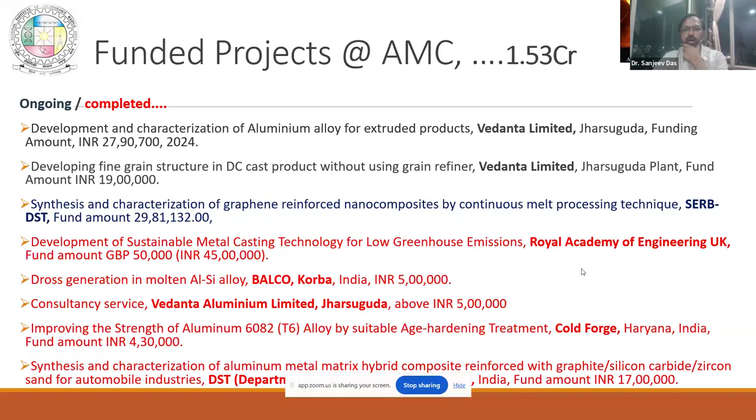Now, this near about 1.5 crores of funding we have received in the last 7 years, and the red ones are already finished, while the dark black ones are basically running projects that are going on. Now let us come to the problem statement - why we are doing this research.

These are the numbers of vehicles that will be there - 1450 million vehicles will be on the road by 2030, and they will consume near about 2000 billions of oil. Also a lot of CO2 emissions will be there, and a lot of vehicles will be scrapped, because in India you can generally sell second-hand or third-hand cars, but in most developed countries, they do scrap their products. So we have to start thinking about all these things.

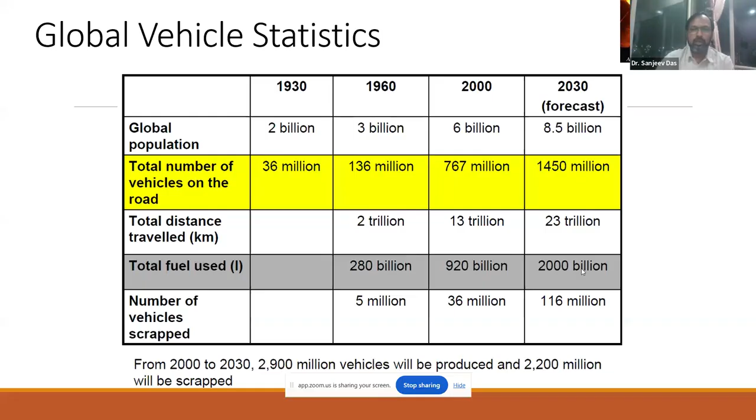Now, as technology has advanced, we have seen that the weight of the car is increasing day by day. The reason for that is basically the safety issue. Earlier, when motor cars were initially there, they were very light, but the speed was not that great. So the accidents were not that fatal.

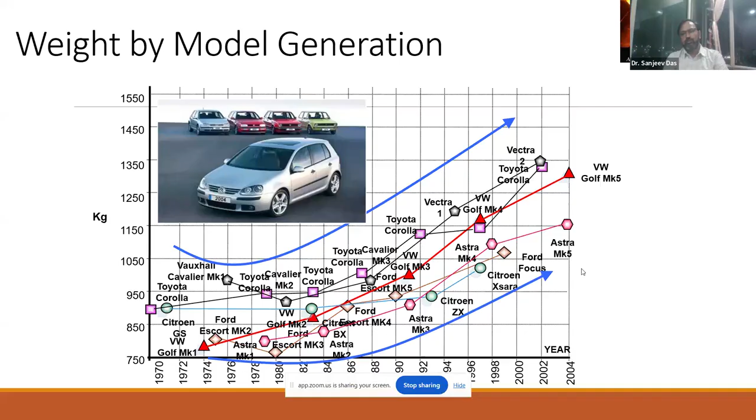When you increase the speed, then your car should be crash resistant, and to make it crash resistant, people use more metal on it. That basically increases the weight of the car. Now if there is an increase in the weight of the car, it will consume more fuel and emit more CO2 gases. So that is the issue we are basically addressing.

A mechanical student can easily understand that if the weight of the car is high, a lot of things will act on it: acceleration resistance, the weight works there also. If you accelerate the car, or go uphill, gradient resistance and rolling resistance are there. Only aerodynamic resistance depends on the design, but the rest directly affect the weight of the car.

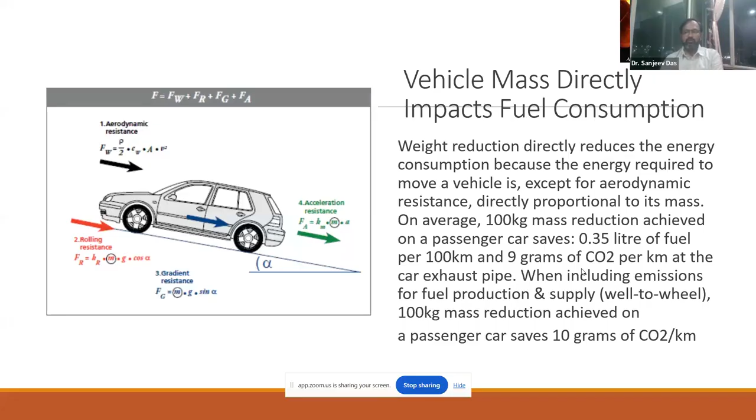Now if the weight is increased, then the CO2 is increased. Here we can see how much CO2 will increase when we increase the weight. And increasing CO2 means you are spoiling our atmosphere.

So what people are doing is trying to use aluminium alloys. In aerospace or aircraft, aluminium is vastly used because the price is not an issue. Quality, durability and accident resistance are very important in aeroplanes. But when you go for a car, the price increases. Still, some companies are using more aluminium extruded products in cars.

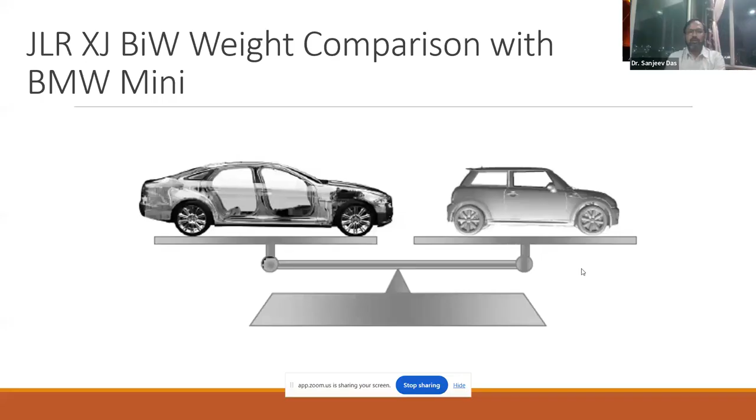So this is a two-car comparison. You can see one is a sedan car and one is a mini car. The sedan car is basically JLR, Jaguar Land Rover, which Tata has already acquired. You can see that an aluminium frame of the JLR sedan car is equivalent to the weight of a BMW mini car, meaning this big car will spread the same amount of CO2 emission as the BMW mini. So that is how, when you change the material, you can get better output.

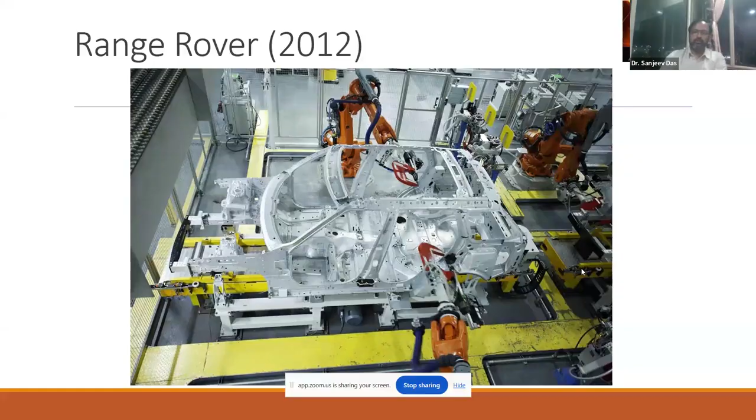Now, why am I talking about cars only? Because there are a lot of modes of transport — rail, aviation, ship. But if you see the pie diagram, 41% of the cars are there in the transportation sector, which contributes to greenhouse gas emission. So that is the real concern.

Now we are aiming to drop down the weight of the car so that the direct CO2 emission reduces. For that, number one, you use lightweight material — the lighter weight is aluminum, even more lighter is magnesium — because their density is very low compared to steel. Aluminum has one third the density of steel, and magnesium has one fourth the density of steel. However, the strength and cost of production is the issue, because steel strength is very high.

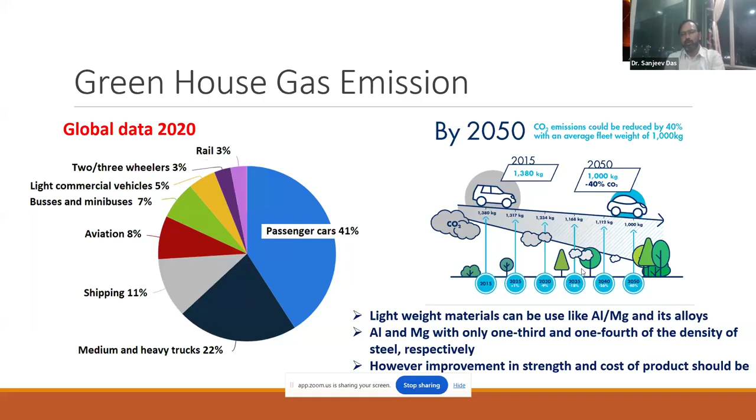So it is very difficult to replace steel. If somebody says they can replace steel, that will really be an engineering challenge. Also the cost of production is an issue, because aluminum production cost is much higher than steel production cost. A lot of other factors like recycling also come into play when talking about using lightweight materials.

In India, mostly we reuse. If it is not working, we fix it and then reuse again. Sometimes we remanufacture it. But this has to be there to minimize energy consumption. We have to reuse, remanufacture, recycle, and do recovery of whatever we can, so that we don't dump things and the cost of production decreases.

Now, as mechanical engineers, what they can do is design structures such that less weight material is required, and that can be easily detached and recycled. As a metallurgist, what we can do is refine the structure or use certain alloys and composites, so that you can get better mechanical properties with lower weight.

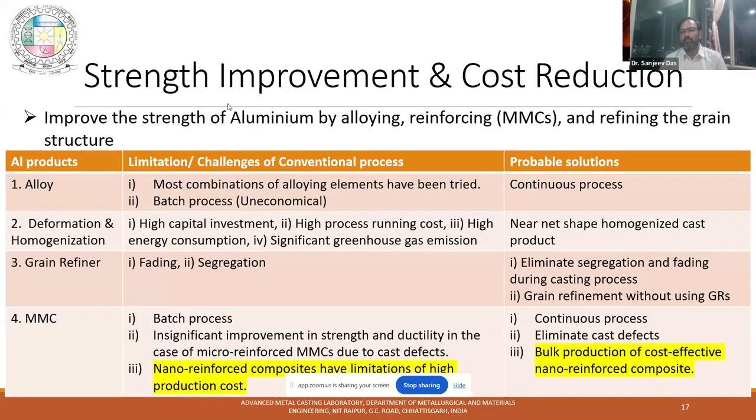Now, based on this table, let us go for further understanding through the pictures. Now, I told you about batch type processes.

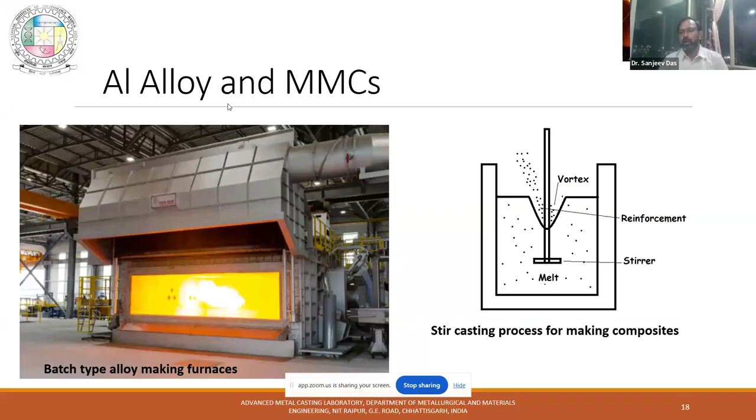Now, about making metal matrix composites, most metal matrix composites by the liquid metallurgy route are made by the stir casting process. What you do is take a mold with liquid metal, stir it to get a vortex, add particles into the vortex, and they get mixed. But again, this is a batch type process, not a continuous one. If we make it continuous, production will be high and cost will immediately decrease. So how can we do that?

About grain refiners, I have told you they are basically rods containing titanium boride in aluminium. It's like a composite itself. This titanium boride acts as a nucleating site during solidification, giving you a fine grain structure. Industries buy these grain refiners from European countries, and they are very costly, but they use them for refining the grain structure.

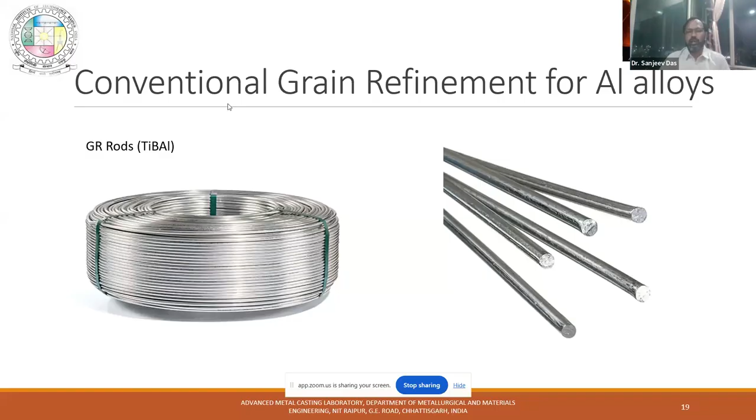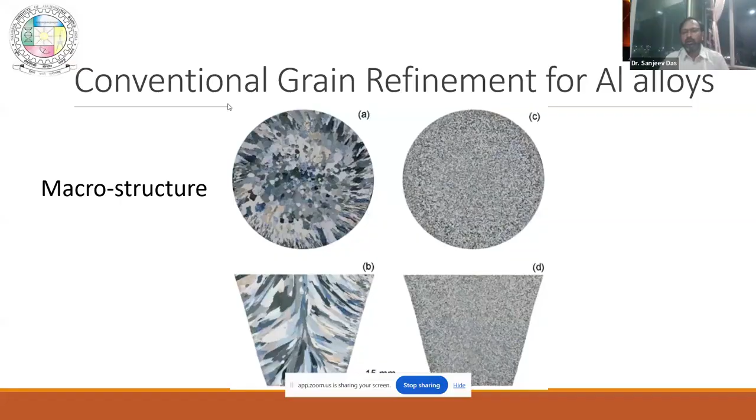And there is an equation called the Hall-Petch equation, which metallurgists are very familiar with. If the grain size decreases, the strength increases, irrespective of chemical composition, alloying, or anything else. So that is the beauty of the grain refiner.

Now let us come to some basics to understand what exactly solidification is. Solidification is basically the transformation of a liquid into a solid. That is the simplest way to understand it. How it happens: number one is nucleation, and number two is growth. First there will be nucleation. So nucleation is a separate science, and growth is a separate science.

Nucleation can be further categorized into homogeneous nucleation and heterogeneous nucleation, so two types. What is homogeneous nucleation? In liquid, atoms come together as the temperature drops and form a cluster. Initially one cluster forms, but there is latent heat release, so this cluster breaks up again. As you keep dropping the temperature, more atoms come closer, making a bigger cluster, and when a nucleus is formed with a critical diameter, the growth starts.

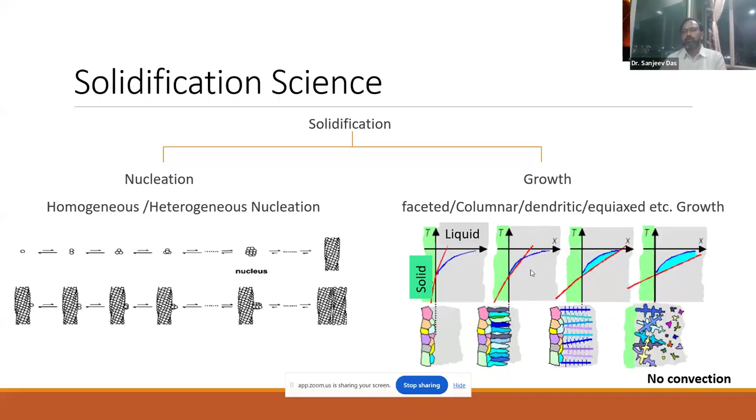It also depends on the temperature gradient, meaning what is the temperature at the center and what is the temperature at the surface. If the temperature at the center is very high and the surface is very low, maybe a faceted structure will happen. You can see the red line going from vertical slowly to horizontal shape. If it goes down like this, different types of these structures will form. Irrespective of adding any grain refiner or alloying element, you can change the structure by changing this type of thermal gradient and the situation inside the liquid metal.

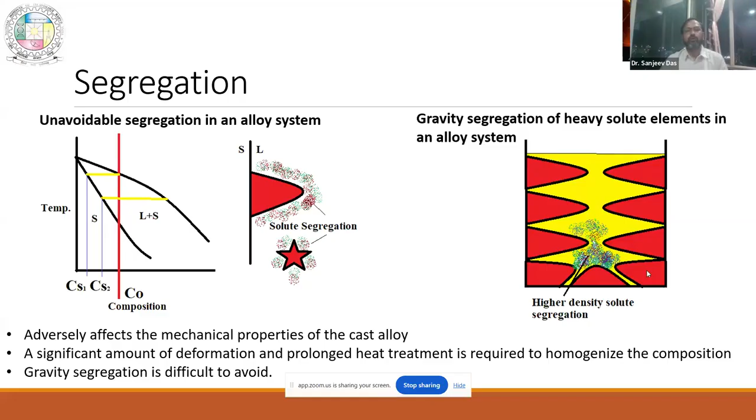Now, if you have this kind of segregation, it is called macro segregation. Macro segregations are very difficult to get rid of, so you have to do a lot of homogenization treatment, and that will consume a lot of energy. And suppose your solute density is quite high, it will tend to go down by gravity - that is another issue. I will show you some aluminum-tin experiments also later. So these are some of the issues we have to take care of when working on it.

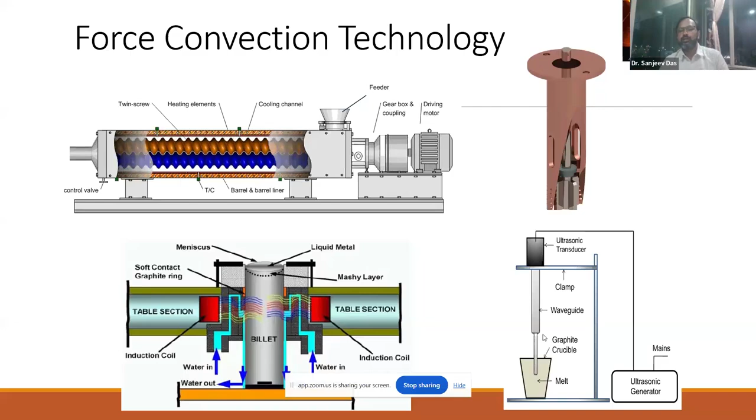The fourth one is basically the ultrasonic way of creating forced convection. There is a process called cavitation. When you pass ultrasonic sound, there will be formation of very small voids. These voids will capture a lot of dissolved air inside them. As these voids or bubbles increase, the pressure inside will go lower and there will be a collapse. When it collapses or implodes, there will be a lot of agitation inside the metal, and by that agitation you can create convection inside the liquid metal.

Now, with all this information, we have made a DC caster. A DC caster is a machine used by aluminum industries, where there is a mold which is basically open at the top and bottom.

You put the liquid metal there, you have a stopper plug. Initially the stopper plug is there, so you fill the liquid metal, and when solidification starts, you draw down this stopper at the bottom, sliding it with the help of a pneumatic, electric, or hydraulic system. The liquid converts into solid directly, so a very small mold can cast a huge length of billets, ingots, and the like.

Now, this is a rotor-stator device. We have placed a rotor-stator device as I showed you earlier, creating a forced convection when solidification is starting. We want to see exactly what happens when you create an extra forced convection during solidification. So we designed a full machine here, which is a lab-scale DC casting simulator.

In this you can see the hydraulic system, and you have the billet casting stuff. There are two furnaces in the design. This is the picture where we manufactured this in our laboratory. Everything was manufactured by our students. We indigenously developed and designed this process, and did all the experiments. Only the furnaces were purchased, and the rest of everything was made by us indigenously.

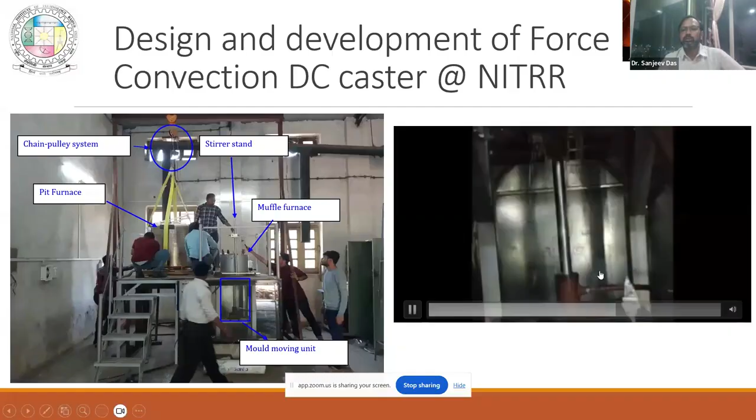Now you can see the video of how it works. You are pouring the liquid metal, using the rotor-stator device at the top, and the casting has started. You can see the piston going down, and the billet coming out from the bottom. This is how the microstructure changes.

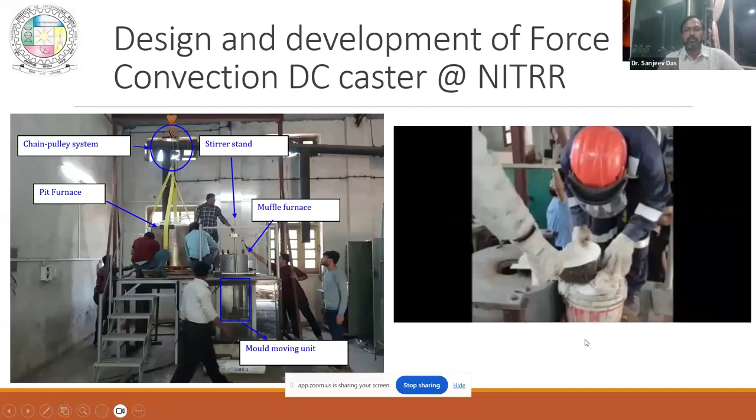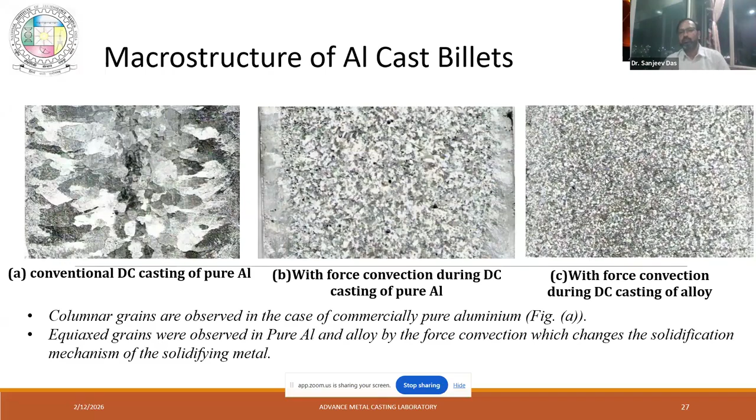Now let us show you the macrostructure. If there is no rotor-stator device, you get big columnar grains, random grains. At the center there are fine grains, at the side there are fine grains, and in the middle you have columnar grains. When you start forced convection, all the structure changes into a fine grain structure, and for alloys it is even finer. This is the beauty of it: without using any grain refiner, just by introducing forced convection, you can change the structure. Basically, you are decreasing the grain size, and by decreasing the grain size you are increasing the strength of the material without changing the chemical composition.

Now, again, we have added tin, a heavy metal. The density of tin is much higher than aluminium. So if you don't use a rotor-stator device, the tin will settle at the bottom. But if you use it, it equally distributes inside the billet. So you can beat gravity, and beat columnar grain formation, with the forced convection machine. We have a patent for this technology.

And the next one is basically by the electromagnetic method. The earlier one was by mechanical forced convection.

This is the electromagnetic setup. I have shown some photographs of the TP1 test procedure where we basically measure the grain size. This is the equipment for the TP1 test, and this is the mold. It is basically a conical type of mold where you pour the liquid metal and place it here, and the water jet comes from the bottom.

When the water jet comes, what happens? The solidification starts from the bottom to the top, and you get more columnar grains from the bottom to the top. Now, if you have good refinement, these columnar grains will not form and you will get a refined structure. That basically shows how good your grain refiner is.

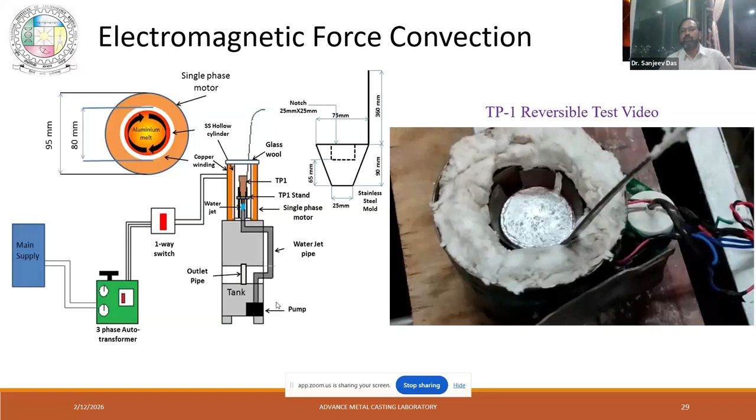You can see the motion of the liquid. You can rotate the liquid clockwise, anti-clockwise, both directions, by changing the current. Now it is solidifying - you can see slowly the motion is decreasing. So now, without adding a mechanical stirrer, by electromagnets you can basically rotate and have a forced convection.

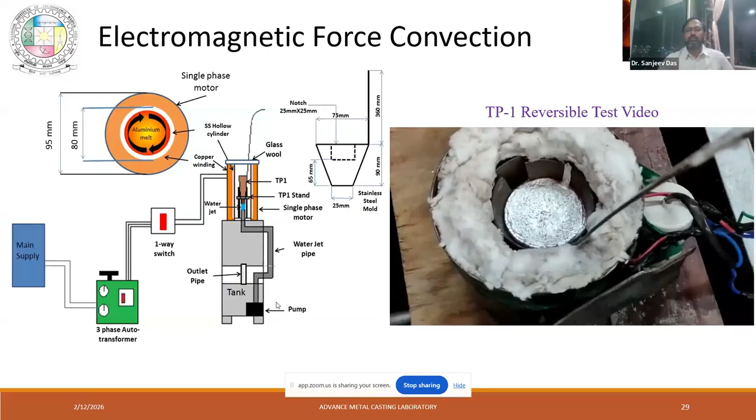So based on this result, let us see what we get in the microstructure. Again, we take a section of it, the top section, and you see there is a certain amount of refinement. Now if we quantify it, we see that the grain size decreases with the current. Current means what - if you give higher current, you get more magnetic field, right? So as you increase the current, the grain size is decreasing.

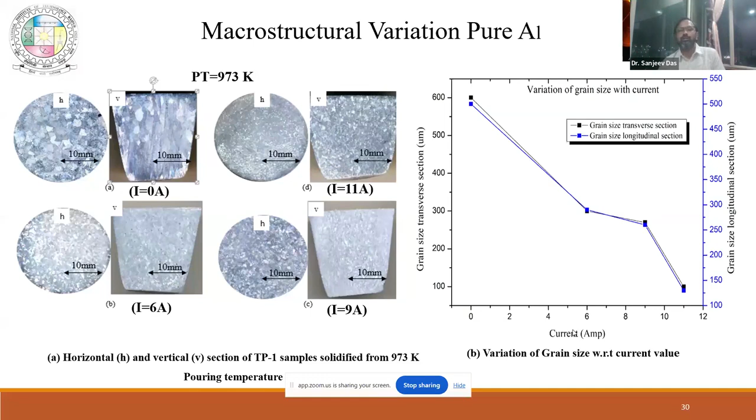Now this is the beauty of it - it's not about how much grain refiner you have to add. It's about how much current you are giving to the liquid metal during solidification, and it will create the magnetic field, the stirring effect, and finally decrease the grain size. So we are completely eliminating the presence of grain refiner here.

Now that is the test procedure. Now we have to see whether this really works in a real industrial scale, or in some prototype or not. So we made a twin roll caster. Now what is a twin roll caster? We have two rolls rolling in opposite directions.

You put the liquid metal from one side and you get the solid strip. Now you can make near net shape strips, so you can eliminate all this hot rolling, cold rolling process. You cannot fully eliminate it, but you can certainly decrease a lot of hot rolling and cold rolling, and you can really save a lot of running cost and capital investment.

So this is the twin roll caster which we have designed and manufactured in our lab, and we have put some electromagnetic stuff in this twin roll caster when we are putting the liquid metal.

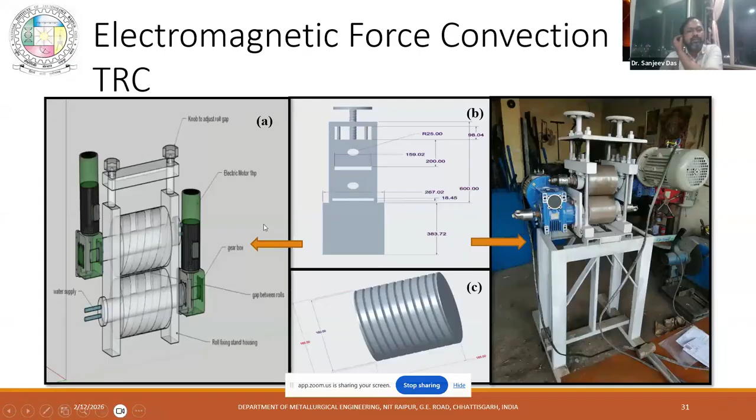Now let me show you our design. So here there are two rolls inside this - these are the roller assembly, and these are internally water cooled rolls. You can see there are some grooves on the rolls inside, so the water runs in these grooves, and there is a sleeve at the top which is water cooled. So the temperature is completely maintained here, right?

And then you have the tundish here, from where you put the liquid metal, and the magnetic field is there which will rotate the liquid metal during the solidification process. We have also patented this technology. This is a picture of the real one - here, this is the magnetic field we are generating.

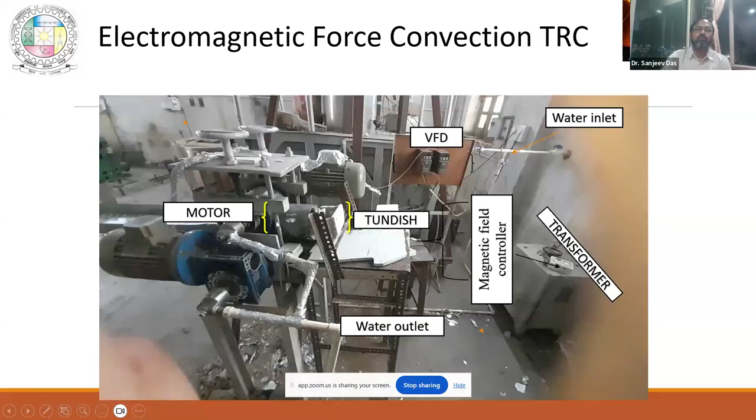This is the tundish - we pour the liquid metal here, there will be some turbulence, and then you get the sheet metal casting. So these are some of the castings we have tried with different pouring temperatures and different currents, and we tried to understand which is giving the better casting.

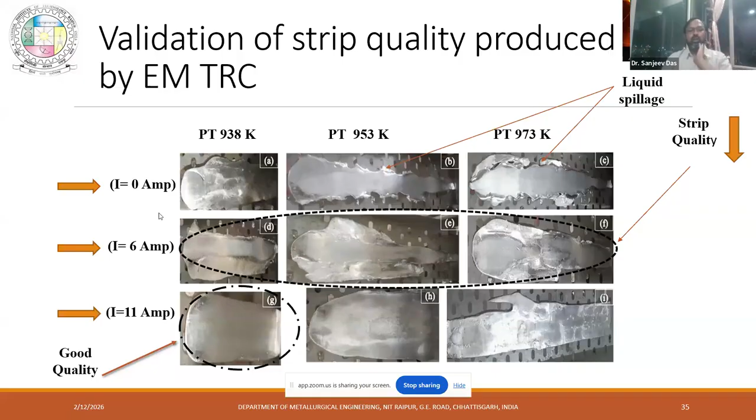So in lab scale, we do extreme experiments. You will see a lot of strips are very ugly - we are doing some extreme stuff, and then we are getting some good quality also from those combinations. Now this is the sectional picture - like if there is a strip, you cut the strip and take the cross section.

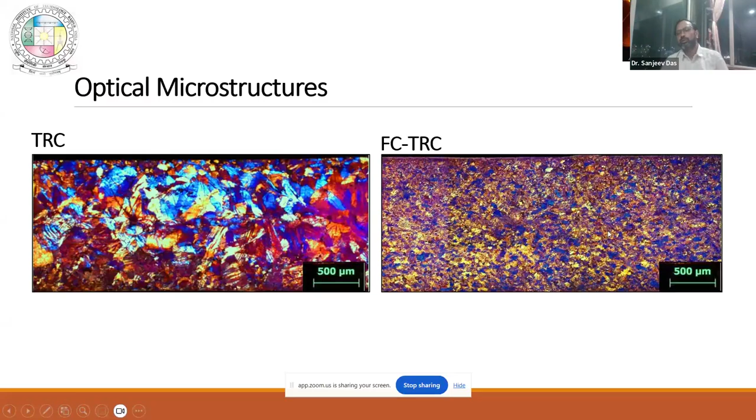Now the cross section we have seen under polarized optical microscope to observe the grain size. Normal twin roll casting will give you bigger grains, random, a combination of fine and big grains. But when you apply the electromagnetic setup, you get a fine grain structure all over it. That is the beauty of the technology.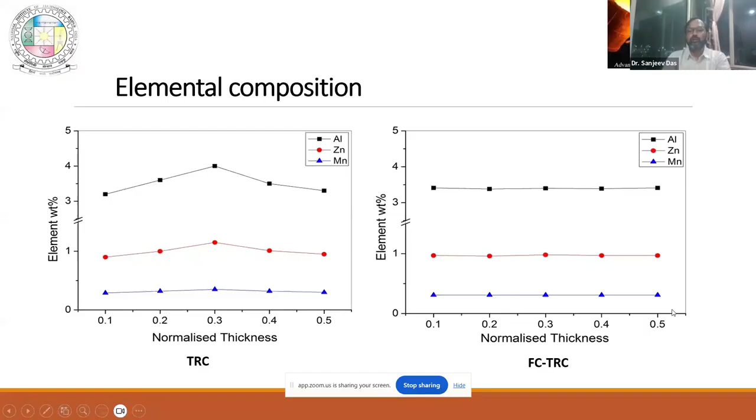If you see the elemental composition, there is a lot of segregation in the case of normal twin roll casting at the center, but it is quite uniform for the forced convection twin roll casting.

Now about homogenization. We tried to do some homogenization of these materials. After 3 hours of homogenization, we still find some bigger grains in the twin roll casting stuff. But after just 1 hour, you get a very fine equiaxed structure in the case of forced convection twin roll casting.

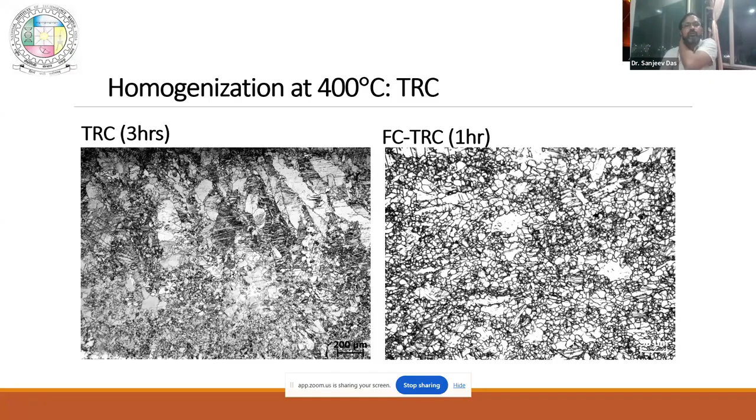This next part is the complete cycle of how we are homogenizing these strips. You will see that for TRC, it is very random with very big grains. But for forced convection, after 15 minutes you can get a very equiaxed, fine grain structure, and it stays constant. Now the question is why this happens.

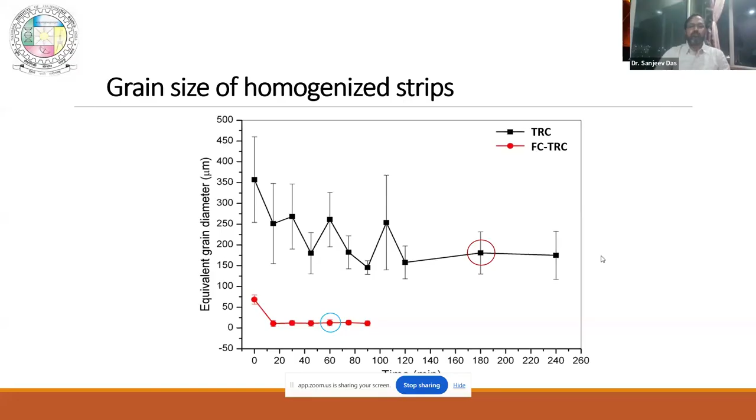Now when it comes to the center of the casting, it drops down the melting point there, which is understandable by the phase diagram. And what happens is that your twin roll casting is divided into two parts. Actually it's not just casting, it's casting as well as rolling. So it has a casting part and a deformation part.

But if you have some convection, if you are adding any particle, or if there is any alloy, the nucleation starts in the liquid, not from the surface to the interior, and your deformation region basically increases. When the deformation region increases, you get a lot of defects like dislocations and so on, which helps in dynamic recrystallization. So it is much easier when you have more deformation, and that's why less time is required when heat treating the material to get the desired structure.

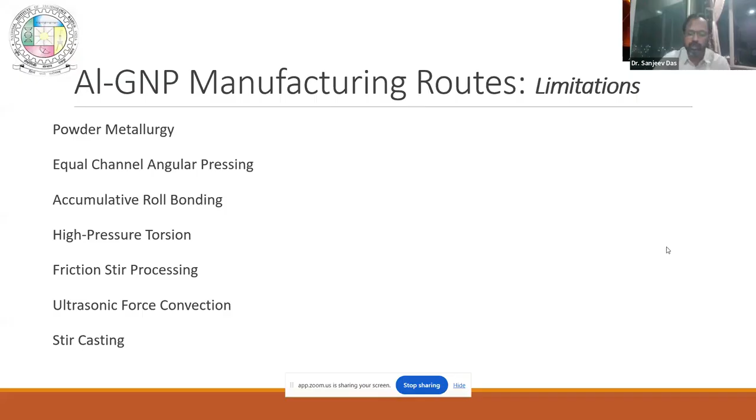Nanocomposites are basically made by a lot of different processes, so one by one I will tell you about them. Number one is the powder metallurgy process. This is a very easy process to do. You take different powders, mix them, then do compaction using different types of tools to get different shapes, and then do the sintering part. During sintering, you make the composite or the components.

But the problem is, when you are adding all these particles, you are not able to take out the air entrapment which is already there, so there will be a certain amount of porosity left in this kind of process. Another issue is you cannot make very huge production by the powder metallurgy route. You can make a lot of small products, but huge products are very difficult to make because you require a lot of hydrostatic pressure.

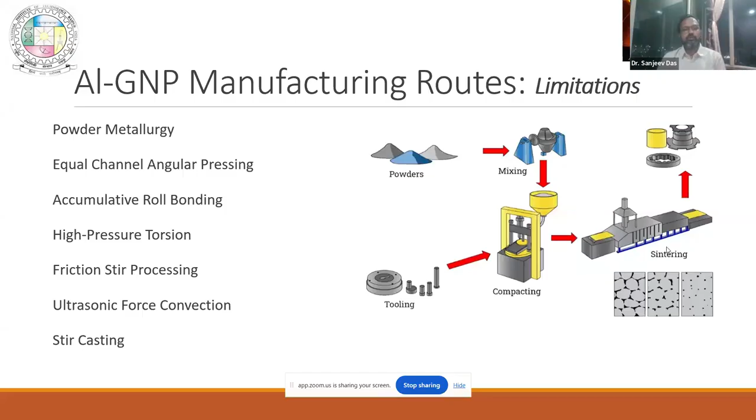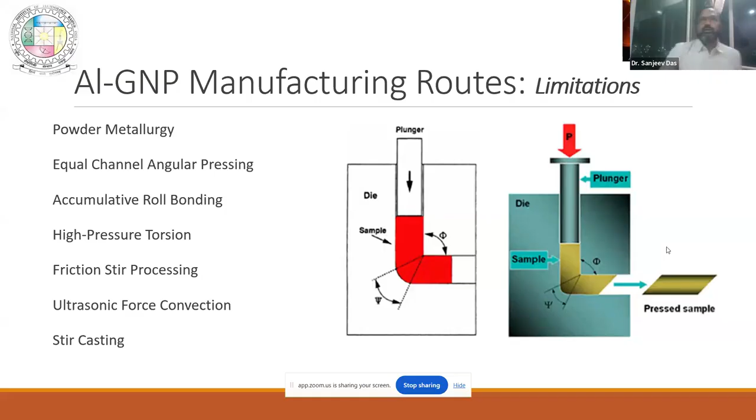Next is basically the equal channel angular pressing. Here what you do is you are mixing these materials in an L type of pattern, and then you use a plunger and forcefully bend it, thinking that it's going to mix. But it's very difficult because it's a solid stage process, and it's very difficult to get a uniform mixing of these particles.

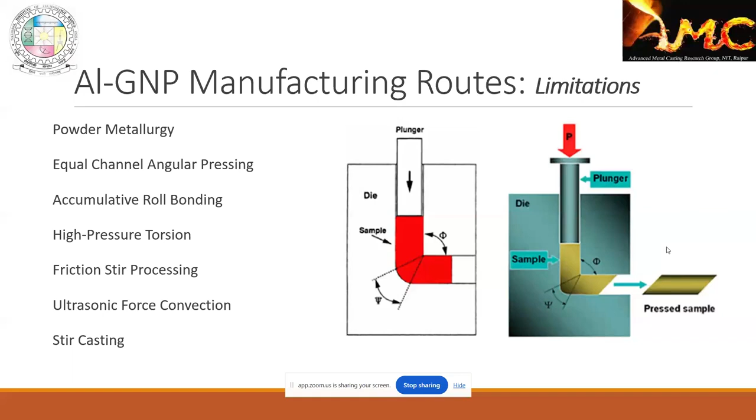Now, the third one is accumulative roll bonding. So you take the particle, make a sandwich, and then start rolling it to a thinner section, assuming there will be nice mixing. But I doubt it, because these particles will stay in the middle, making a sandwich type structure, and it's not going to uniformly distribute the nanoparticles.

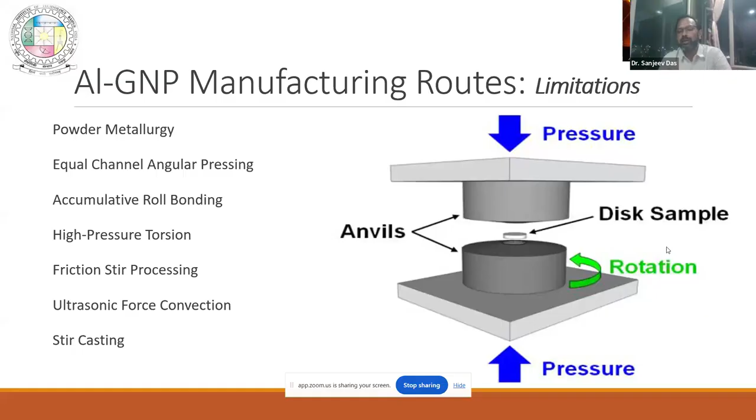The next one is high pressure torsion. You make tablets at the center and create a torsion force so that it mixes and joins together. Again, the limitation is like the powder metallurgy route - there may be porosity and there's a size restriction.

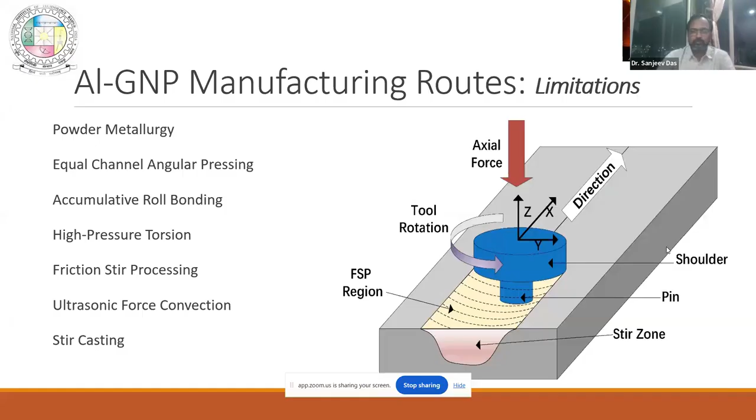Then friction stir process. Basically this is used for welding, but some people have tried adding particles when doing the friction stir. But again, it will be on a line joining part. How you are going to make a plate out of it, or a bulk material, is challenging.

The second last one is ultrasonication. It's widely used by a lot of people to make nano composites, but ultrasonic forces basically don't incorporate the particles inside the liquid metal. What it does is uniformly mix it, but you have to incorporate the particles by the stir casting process, and then use ultrasonic treatment to uniformly distribute the nanoparticles inside the metal. So ultimately you have to do the stir casting process.

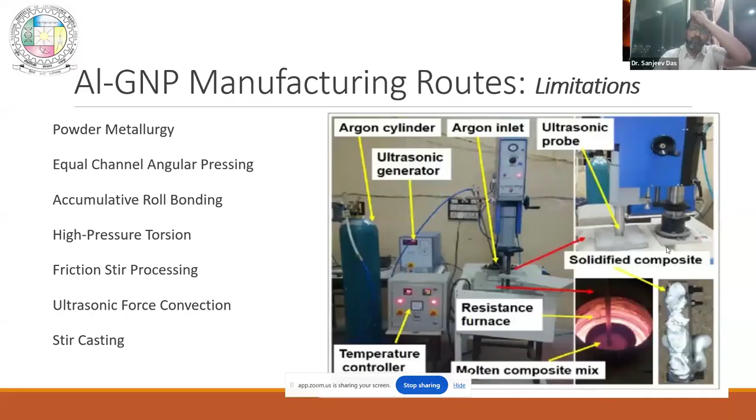Initially I showed you there will be a vortex formation, and in that vortex you have to add the particles. Now when there is a vortex formation, anything on the surface goes inside the liquid metal. Suppose some dross, slag, or air is at the top - everything goes inside your liquid metal, making it full of porosity, gas bubbles, and slag, contaminating your melt. Now whatever ultrasonic treatment you do, you are not able to get rid of those things you added by creating the vortex.

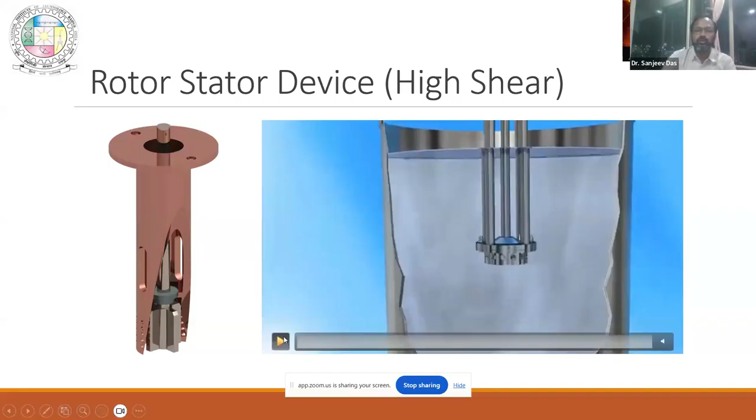That's why we went for the rotor stator device. Earlier I showed you the picture of the rotor stator device. Now I will show you the video so you can understand how exactly this rotor stator works.

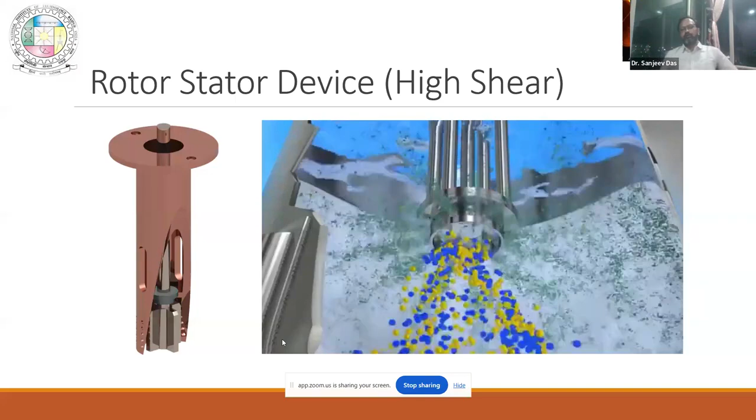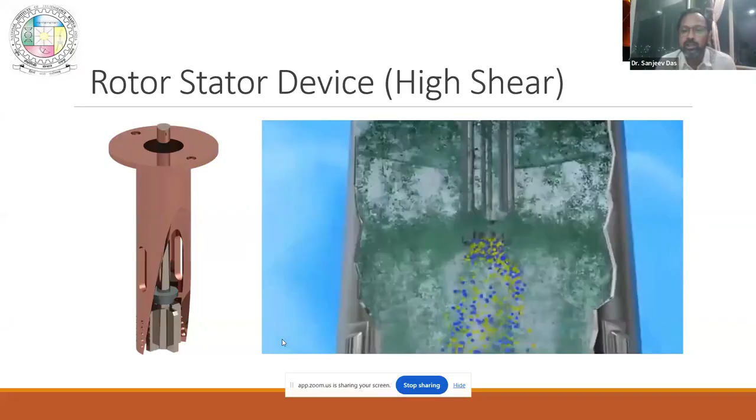Suppose there are particles at the bottom of the liquid. When the rotor rotates, these particles will be sucked from the bottom, and through these splash holes in the stator it will throw the particles inside the liquid metal, giving very good mixing. The beauty of this is there is no vortex formation at the top, so whatever is at the top doesn't come inside, so it is not contaminating. But the only problem is it is sucking everything from the bottom, so you have to feed your particles from the bottom, and that is a challenge - how you are going to feed that particle from the bottom.

So we accepted these challenges and came up with this design. This design basically has a mixing chamber and the rotor stator device. Instead of pouring the liquid metal from the top, we pour it from the side, and it goes below this chamber and comes out from this baffle, then hits the rotor stator device and starts mixing. When the rotor stator works, there is no vortex formation at the top, so any contamination at the top doesn't come in, and you get the liquid metal from the top.

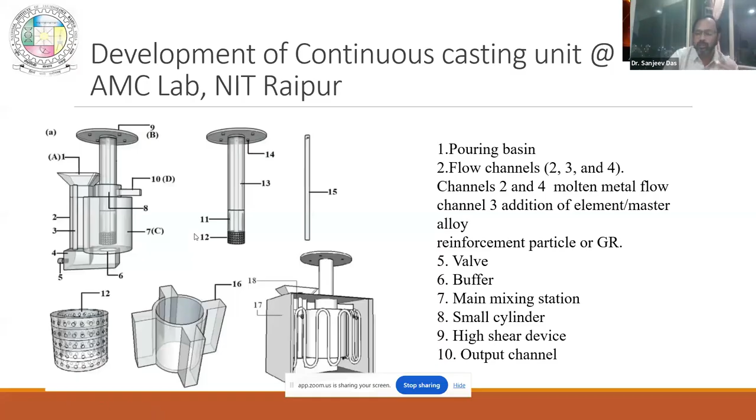So this is the idea we came up with, and we made insulation stuff because all the liquid metal goes there, so we completely insulated it with heaters so the metal stays in liquid condition. I will show you some videos that will clear the idea about it.

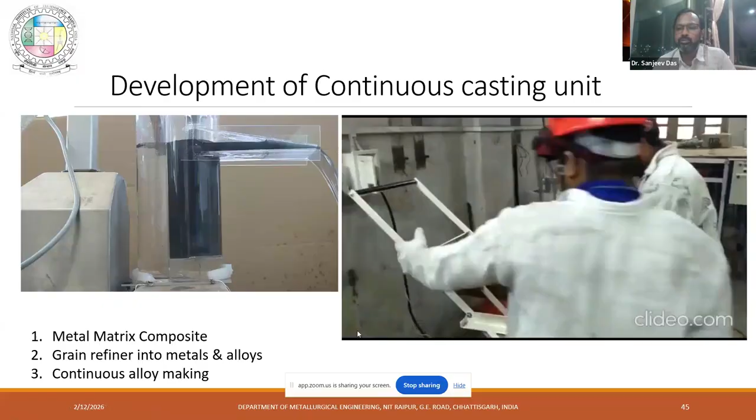Now the same thing I will show you with which we have done with the liquid metal process. This is also in laboratory. This is my PhD student Sandeep Biswas, presently a faculty member in OPJU, he's holding the crucible. We have liquid aluminium there.

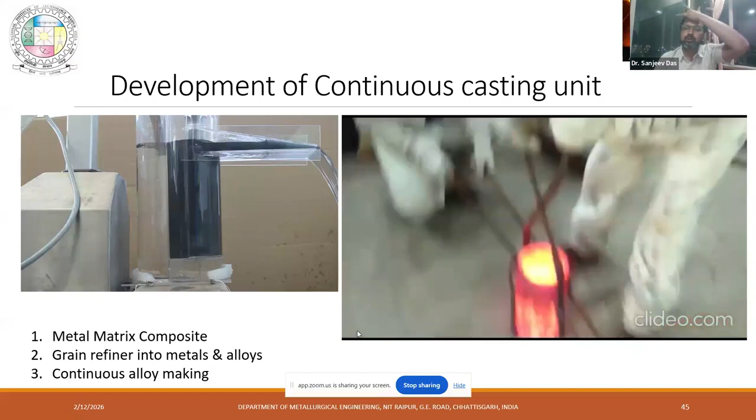Melting temperature, sorry, the pouring temperature is near about 950 degrees centigrade. It's pretty hot. All these tongs and everything we have designed as per our requirement. The other students are undergrad students who are working on it.

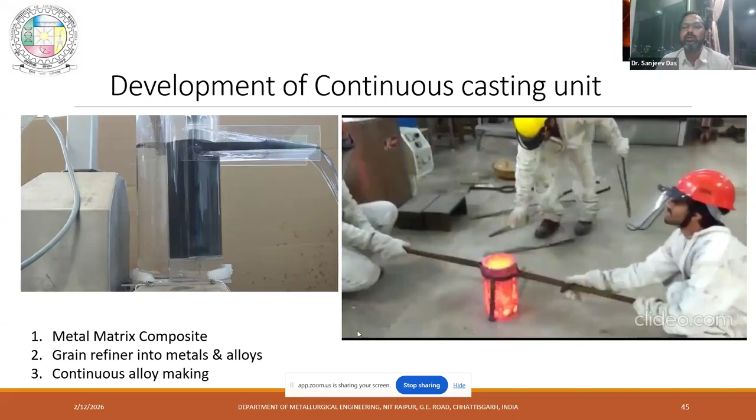So when we do this experiment, first of all, when you take out any liquid metal, you have to take the dross out, because there will be a dross forming on the surface, which is basically aluminium oxide or any other impurity which will float at the top. So basically we remove that from the top surface. Now we have almost clean liquid metal.

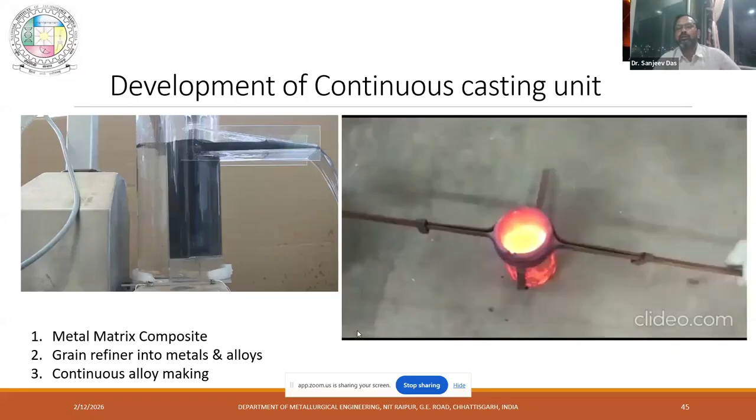In industry you can also do degassing. We are not doing degassing because this is a lab scale experiment and we wanted to validate.

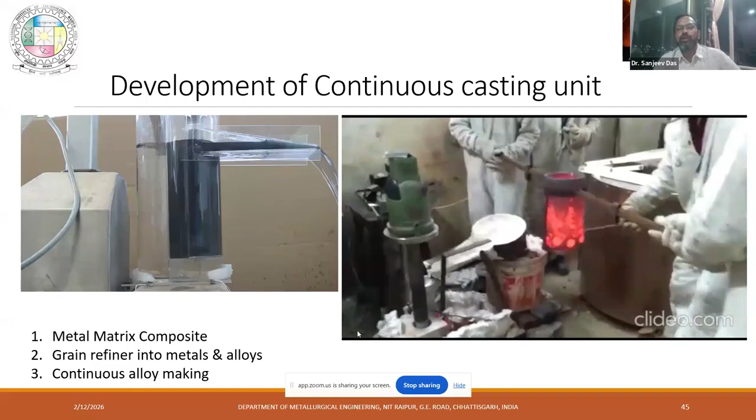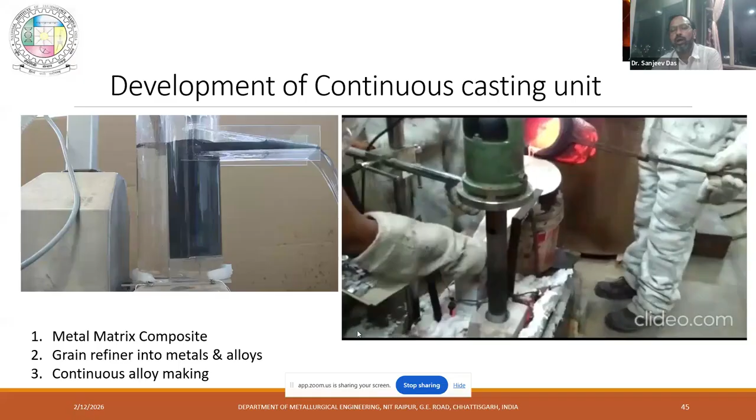Now in the water model, like we have poured the water, now we are pouring liquid metal instead, and by hand the students are adding these pellets, which can be a master alloy, a grain refiner, or a composite material with a higher amount of particles in it, which will mix inside the liquid metal. Now when it goes, you will see the rotor-stator device stirring, and the composite material or alloy you are adding, the mixture is coming from the top. So what you have seen in the water model, you can see the real stuff here in this video.

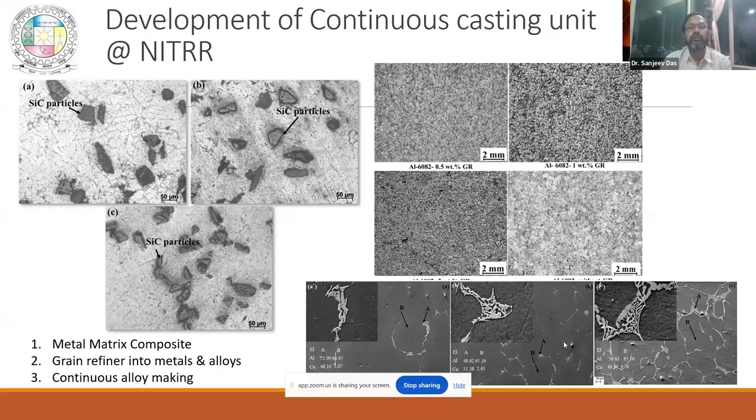And the beauty is you don't need to stop. You can continuously do this by this continuous process. You can change the alloy, change the percentage of grain refiner, change the amount of particle addition in it. So we have the patent for this process also, and a lot of publications are also there which you can follow. Now let us come to the nanoparticles.

So why will we make nanocomposites? That was one of the things. Our industrial partners were looking for electrical applications. So basically the electrical wires, earlier copper wires were used, at present aluminium wires are used. Aluminium has poorer conductivity than copper, but it solves the purpose because it's much cheaper, but the strength of aluminium wire is not that great.

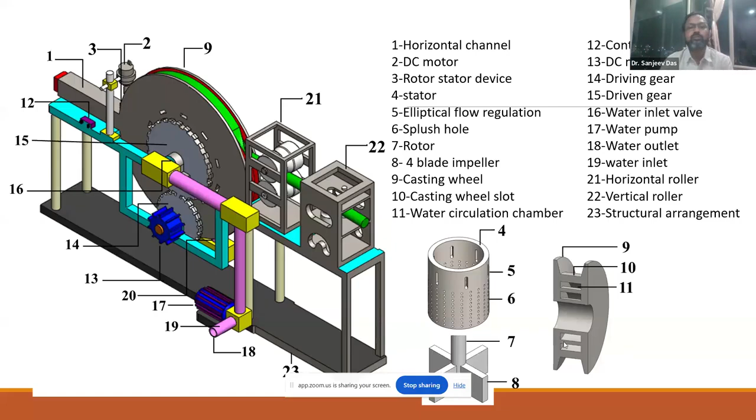So can we increase the strength without decreasing the electrical conductivity? Initially we attempted with graphene, but pure graphene was not available in the market, so we went with GNPs, graphene nanoplatelets, which also have very good conductivity. We have modified our continuous caster with a wheel shaped stuff, where the mixing will be there, and you will get a formation of the rod which will contain it, and then we will do the rest of the studies of conductivity, strength and all.

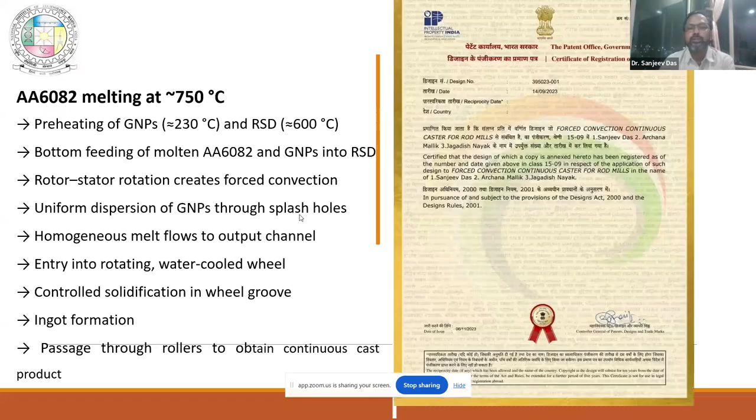Now these are the various parameters we have used in this process. I'm not going through the details. We obviously have a patent of this design also published in the Journal of Manufacturing Processes, so you can refer to this paper also. We have also got one DST project based on this.

Now suppose the nanoparticle has gone in. How will you confirm whether the nanoparticle has gone in? Because macro particles you can see by optical microscope or scanning electron microscope, but you cannot see the nanoparticles, and we don't have transmission electron microscopy facility.

So initially, to understand that, we went with a smart idea: let us dissolve the aluminium in sodium hydroxide solution. Aluminium will react and dissolve, but the carbon will not. So we took water, added 10 grams of sodium hydroxide to get the solution, and added our composite material. The aluminium dissolved in the solution, and the liquid turned black, and then we filtered it.

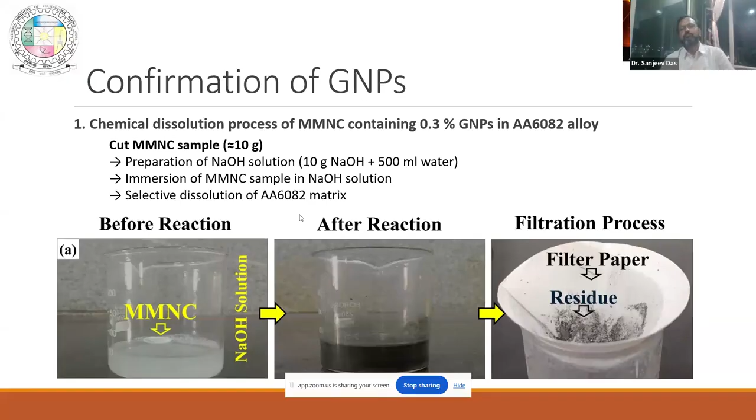Now it is black, but whether it is carbon or not, we have to do X-ray. So we did XRD and EDAX, and we found that yes, these are basically GNPs. So this is an initial understanding, a very cheap way to confirm that the nanoparticles have gone in.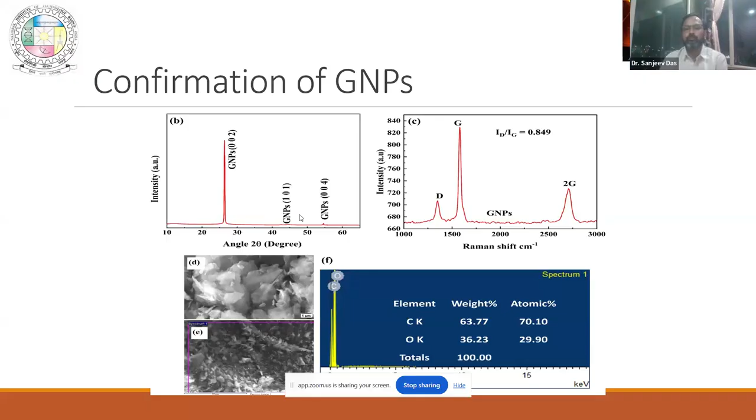But again, there will be a question: the particles may go in, but maybe they are not uniformly distributed, maybe they are agglomerated. So how are we going to understand that? For that we went for transmission electron microscopy. Before that we did some SEM and took dot mapping. We found that if you see the carbon, there are lots of dots uniformly distributed.

Now the problem with EDAX is it will tell you carbon is there, but it won't confirm whether this carbon is GNP carbon or not. But it is showing that there is a certain distribution of carbon around the matrix.

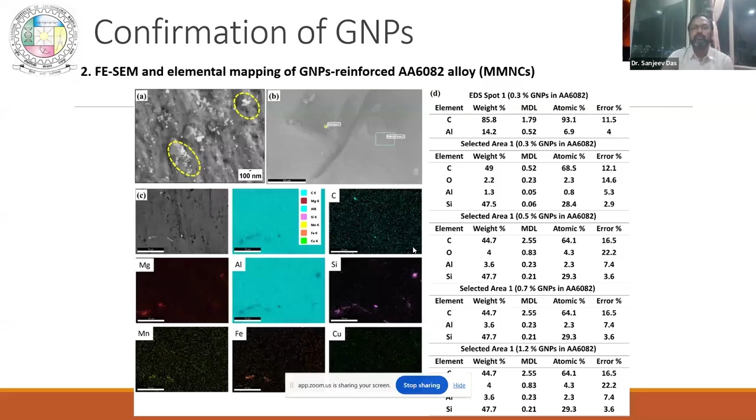Now this is TEM. People can say that yeah, you have taken TEM, so maybe the particles are there only in that spot, not uniformly distributed. That could be a question.

So what we did, we didn't do a lot of TEM, we just did 2 TEM samples from a big billet, very small samples. If it is uniformly distributed, we assume from those 2 samples we will get the GNPs, and we found it for both samples. That means GNP has uniformly distributed. If it were not uniformly distributed, taking 2 samples, it would not be possible to get GNP in both. So by that we can confirm that we have uniformly distributed these particles.

And these nanoparticles can only be incorporated using this rotor stator device. If somebody is selling you a normal stirrer, it is very difficult, or impossible, to incorporate nanoparticles in any liquid metal.

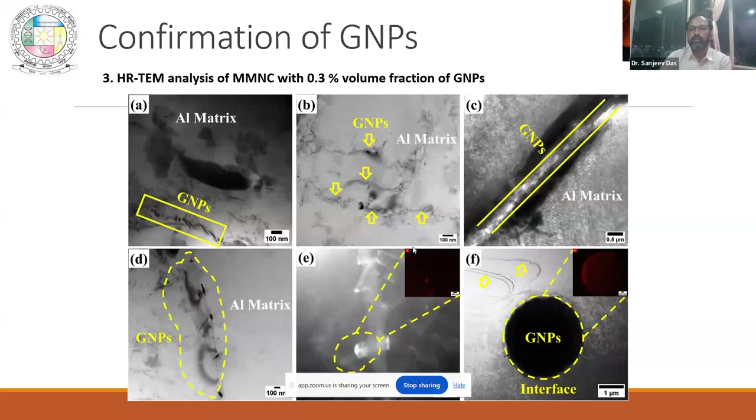Now for an alloy system, what happens? The solute is basically rejected towards the center, and when the solute is rejected to the center, it increases the hardness there. The same thing is happening with the nanoparticles also. You are uniformly distributing it, but some amount of GNPs will be pushed because their size is very small. So the solidification front is pushing some GNPs, not all, to the center.

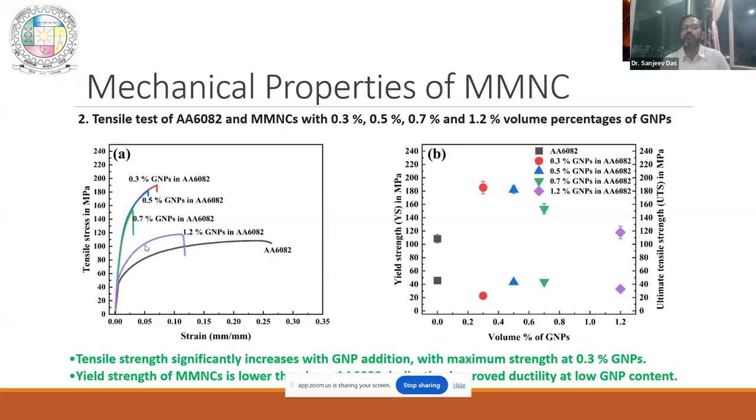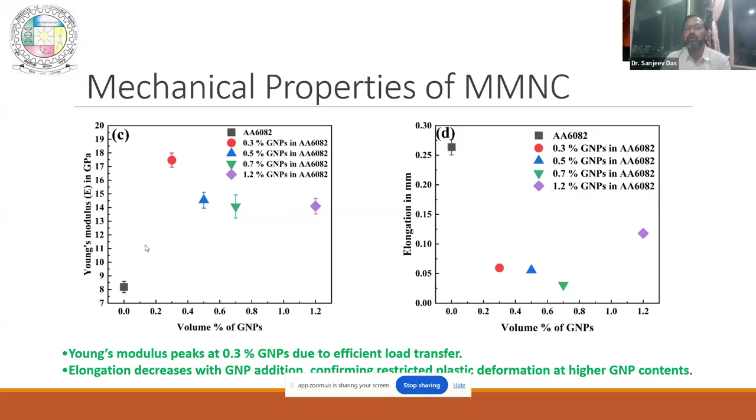Next is the yield strength and ultimate tensile strength of both, which I've already explained, and this is the Young's modulus. Young's modulus is higher in the composite - the stiffness definitely increases when you add this particle. And as seen in the earlier figure, elongation has decreased for the composite materials.

Now let's look at the mechanical properties where we've done fracture surface analysis. Most of them show cleavages, very few dimples, and some cracks formed. As you've seen, we don't have much elongation - the dimples are less, ductile failure is less, and we're having more brittle type of failure. This can be further improved with some amount of working or heat treatment on it, so we can get rid of it and improve the ductility.

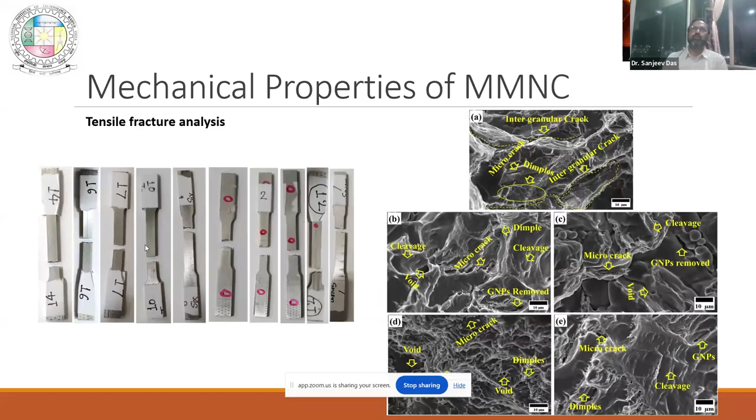So those things we are in the process of developing or improving by other mechanical means. We are trying to do it.

GNPs are not a good heterogeneous nucleating site that would create lots of nucleating sites like titanium boride, which I showed earlier, but it could be working as a pinning agent. Suppose one grain is trying to elongate and grow - then these are not allowed to grow. So that is one of the possibilities.

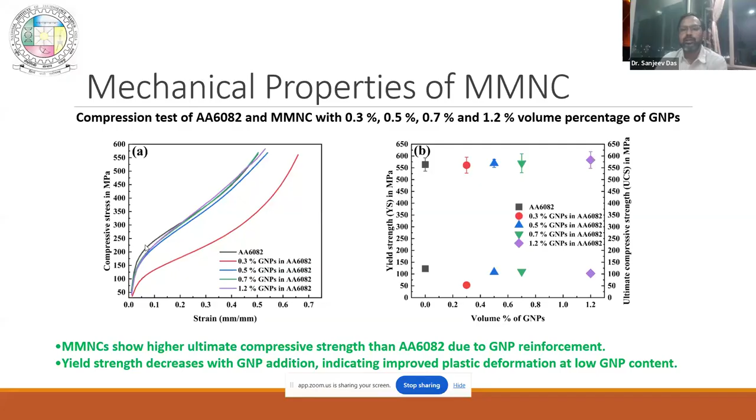Other than tensile testing, we did compressive testing, and these are the compressive test results. In the compressive results, we didn't find that UTS is much better than the tensile strength - it is either the same or it is dropping. You can see the yield strength has dropped, meaning it is not showing that stiffness.

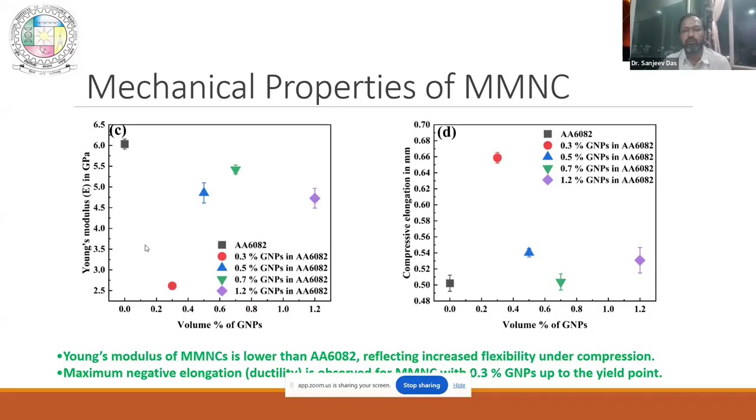In compressive load, it's just showing something different. This is very interesting for us, and we are trying to understand why exactly this happens. But we understood one thing - if you are making nanomaterials, it will give you good tensile strength, but for compressive strength you should go for micro level reinforcement, not nano level.

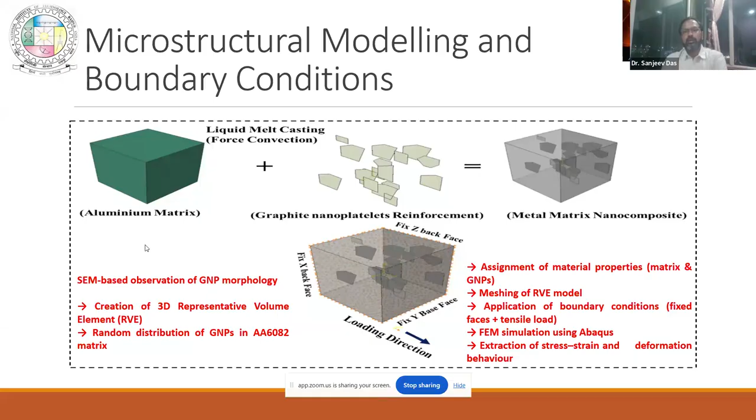We did some modeling, done by my students - most of them are mechanical engineers, and I am not very good or expert in modeling stuff. They tried to understand why this grain size is decreasing, and through modeling they found that the GNPs are basically blocking the movement of the grain growth. So that is what we understood from the modeling part - that grain growth can be restricted by these nanoparticles.

With this, these are my conclusions. I think I have already told the conclusions earlier, so I'm not repeating that.